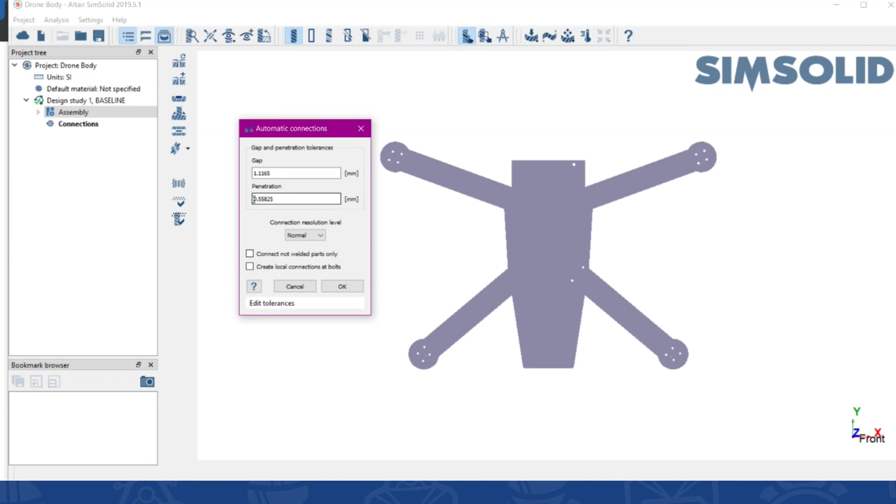We have some options here. We can change the resolution level—normal, increased, or high—or we can change the tolerances. What I suggest is just leave the tolerances, leave it at normal initially, click OK, and as quick as that, it's going to connect everything together.

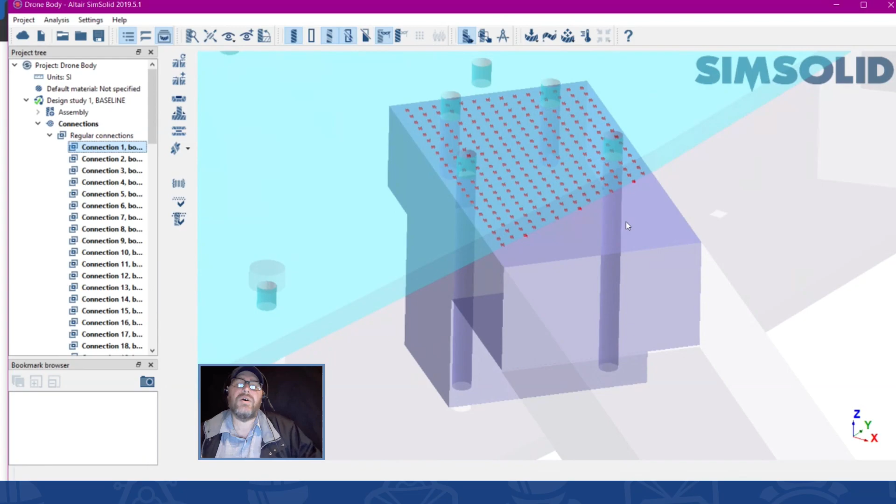Then just take a quick tour of your part. You'll see that once we have everything together, it added this connections entry underneath the assembly. We'll come back to the assembly in a second, but if I click connections, it's going to say regular connections, and now I can scroll through and take a look at all the different connections we have. If I click on one of them, it's going to highlight the two parts. So this drone body, this arm is coming in, and this purpley looking part is one of the two connections, and this teal light blue part is the other, and these little red dots represent the connection between them.

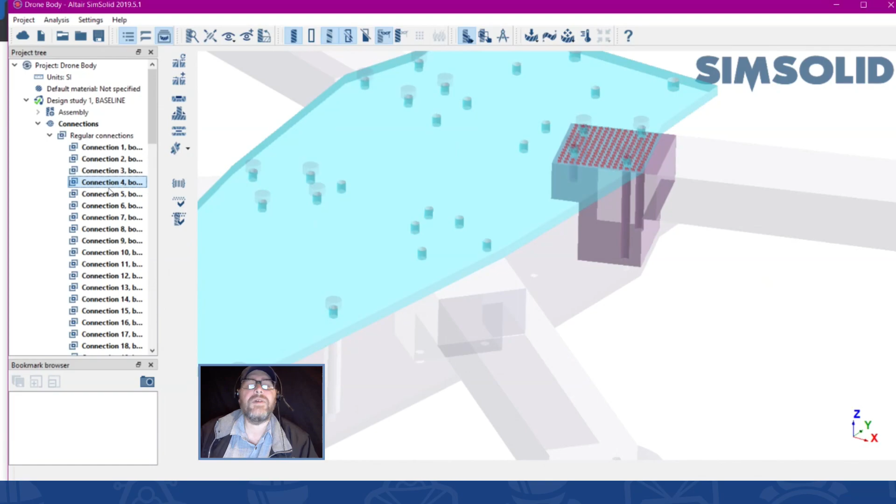So it has connected these two parts together, and I can go through and inspect these connections, take a tour of all the different connections if you want to. It usually does a pretty darn good job of connecting everything together. It's really only when you start experiencing potentially bad geometry that's a little too far apart that you may run into some issues. But in every case I've experienced, just leaving it on normal has done a fine job of connecting it together. It's really only when you have some sloppy geometry that you're going to experience potential problems. So as long as you're diligent about making good geometry, you'll be fine with connections.

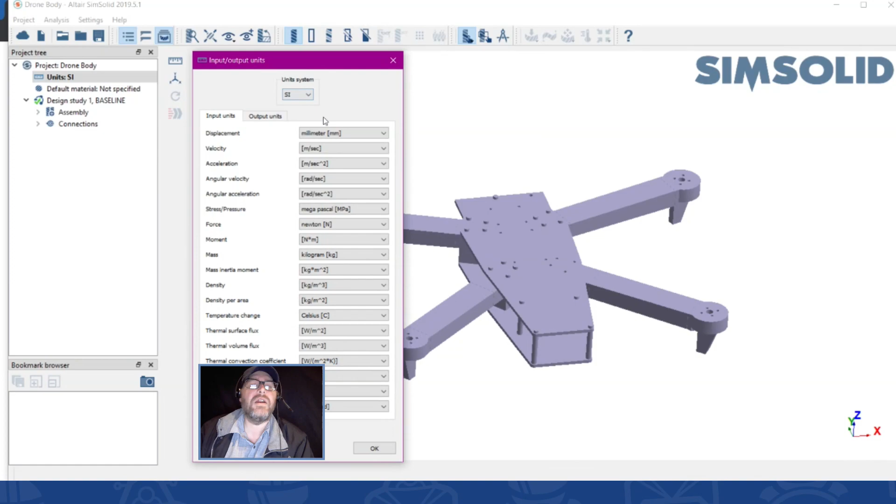Now you'll see we break this into a project. We've got this whole project here, and you're going to find we have multiple design studies under this project. But up here at the top, we've got our basic units. I can come up here to units and indicate which unit system I want to be in. I'm going to stick with SI, so millimeters. I can change the individual units within that unit system—if I'd rather work in centimeters than millimeters, I can change that. This does not affect anything with the part; it's just going to adjust or adapt all the units in there to the new unit system.

So I'm not taking the part and making it 10 times bigger, 100 times bigger, or 1,000 times bigger by going from millimeter to centimeter to meter. I'm just changing the reporting and the numeric values, not the overall size of the part. And then, of course, I can change to IPS if I want to, inch, pound, seconds. That also is not going to affect the part, just the values the numbers are reported in.

And then default material, I could have set that, and what it will do is automatically assign that default material to my part. I don't typically like to do that. I'd much rather assign my materials separately. We'll get to that in a second with the assembly, but just a couple other settings here. If I come up to the top, geometry import settings.

The geometry import settings, there's not a lot: resolution, enhance, fine, custom. Again, I leave it at standard unless I've encountered a problem, which I haven't yet, and then you can change that and it'll grab things. Usually it's when you have a large range of sizes, very small parts to very large parts, and you don't want to lose the resolution on those small parts.

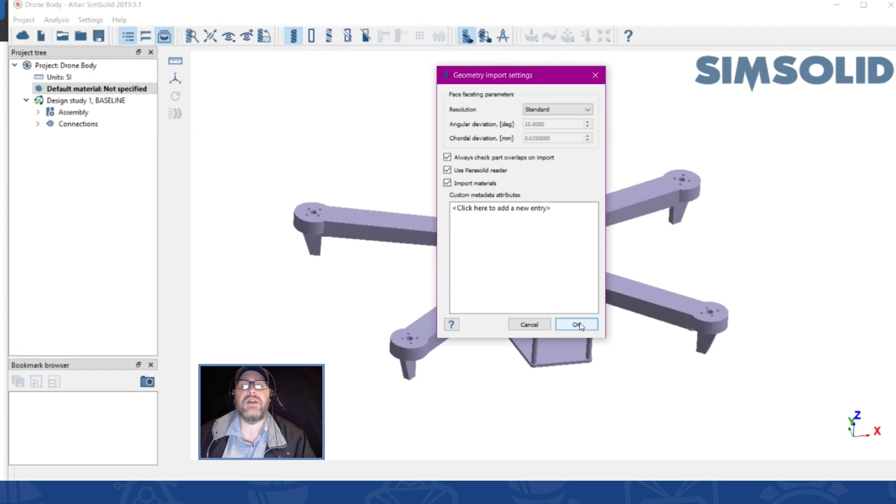The next thing is the standard mouse controls. My left mouse button is doing the rotation, so I let go of it, move it over here, and that allows me to rotate from this side, let go, come to this side, rotate here. My right mouse button is controlling the panning, and then zooming in and out with my scroll wheel.

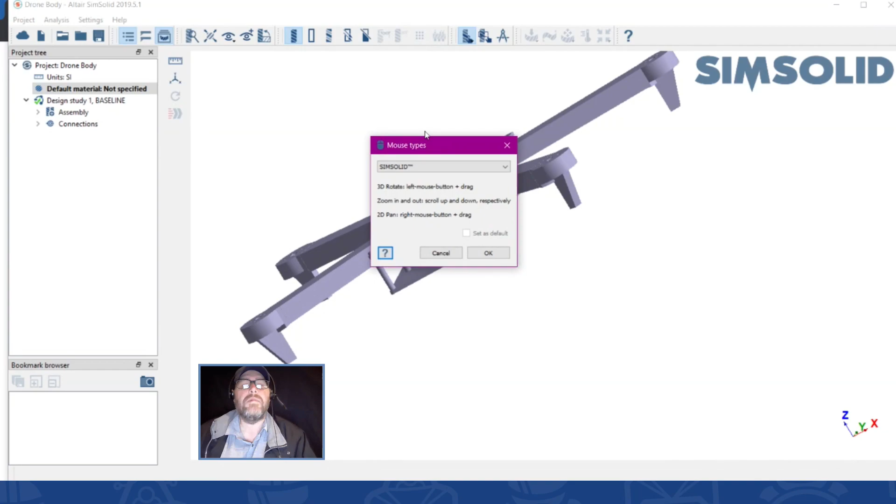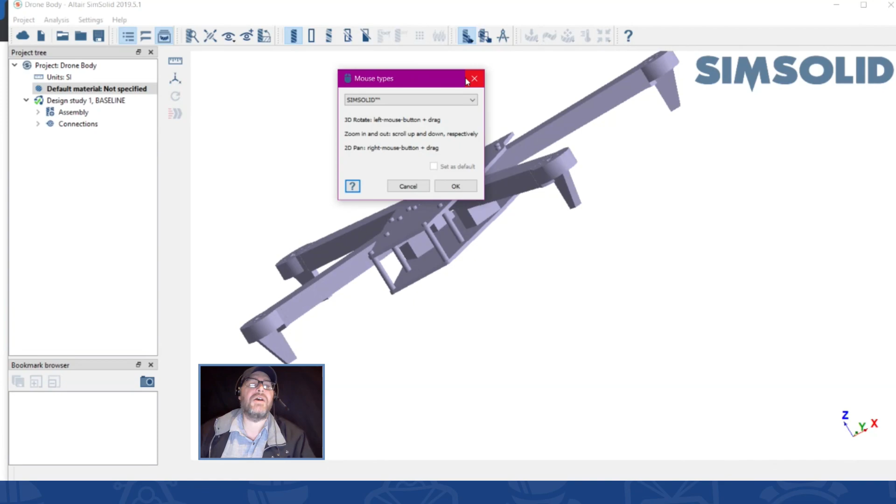But also, if I come up here to my mouse settings, we've included, again like we had with Inspire if you were with us for that, a number of popular CAD packages, and by selecting one of those it will adapt the mouse controls to make sure it's similar to or in the same definition as the CAD package you're in, making that transition from CAD into SimSolid as seamless as possible. And a description is given of what each does.

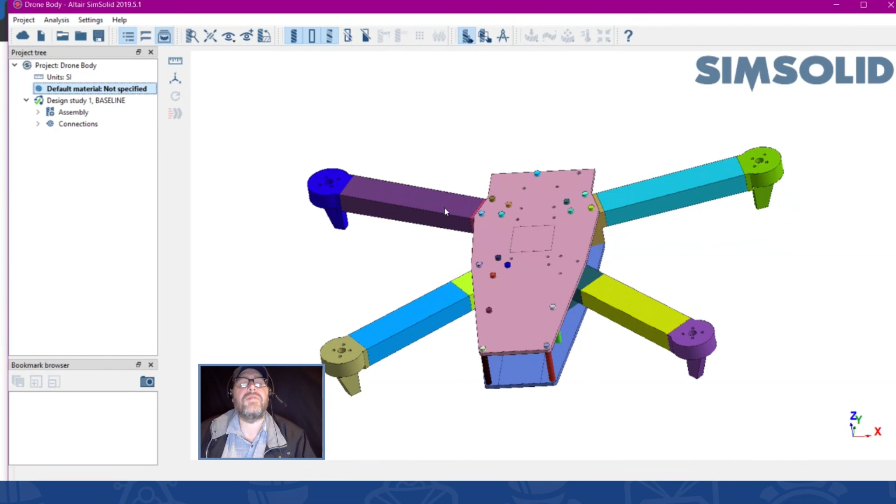Okay, so there's just a few more things, kind of the visualization here. These are our visualization modes: show parts shaded, or show them wireframe. I like this button right here, excuse me, this button takes and changes the colors of each one of the individual parts, so it allows me to visualize the assembly in all of its individual parts. I may not realize, without this, that actually this arm is made up of 3 different parts. I can select them, but this is just a nice, quick visual way of doing it.

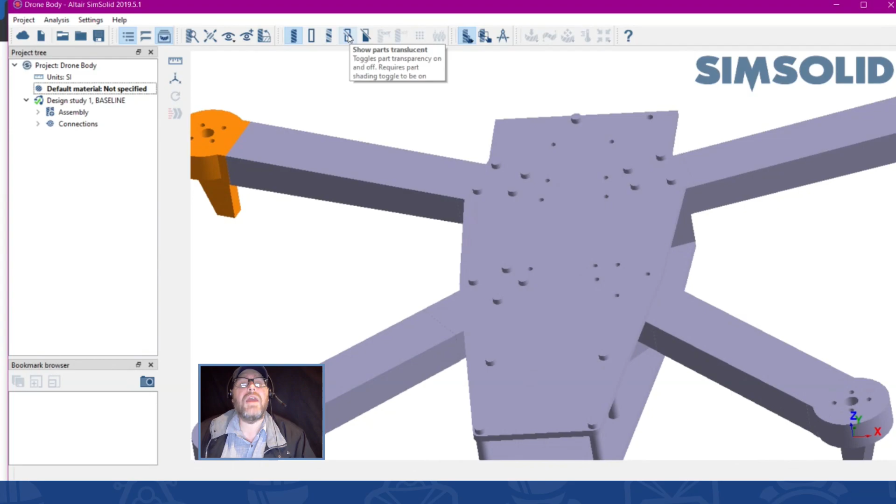And then this option right here turns on edges. I don't normally like that on, we kind of get this step effect, so I typically keep that off. And then we have translucent, so it allows me to kind of see inside there.

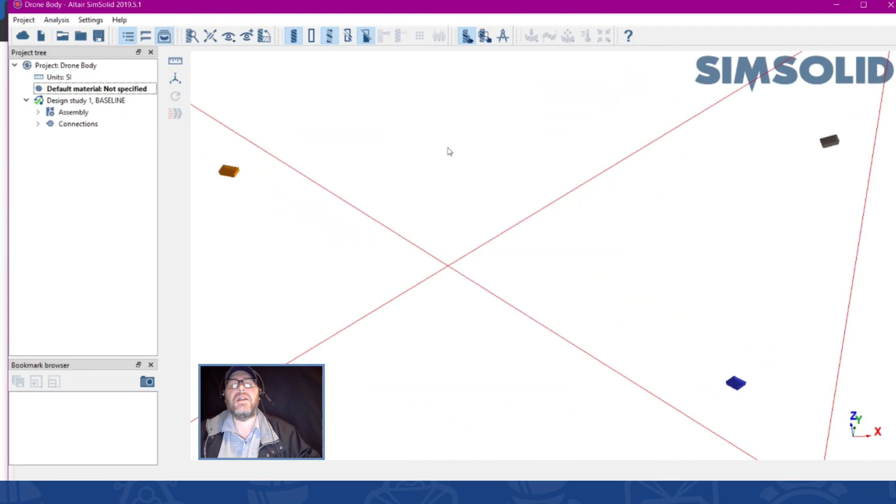And this is a nice one, clip assembly with plane. What it does is it puts a clip plane on there. If I hold my control key and scroll my mouse wheel, let me actually turn the colors on here, and let's zoom in, it's going to take that clip plane and drag it on down. Or if I hold my control key and use my left mouse button, I can actually take that clip plane and change its angle there. And if I mess up and don't get the angle I want, I just turn it off, turn it back on, and it goes to the XY plane.

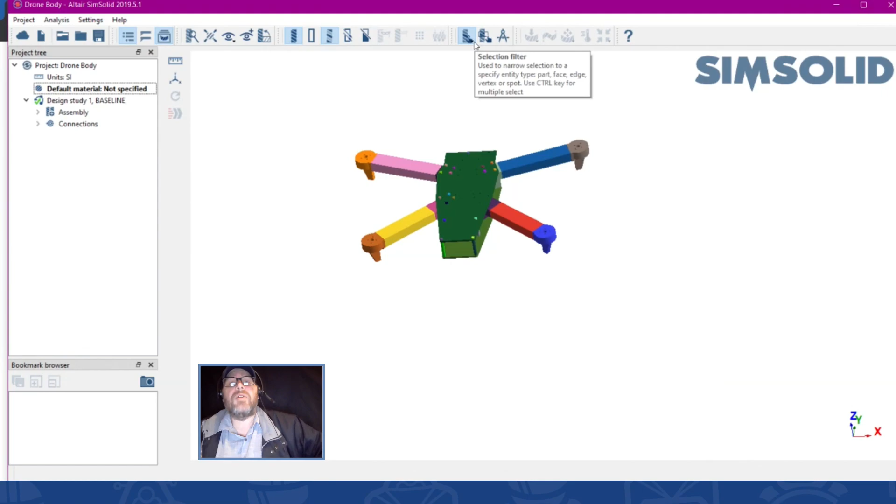Some other things here, we've got measurement. So if I need to take a quick measurement on my part, I just click there and click here, and now it tells me the distance between those two is 189.428 millimeters. So I can get some quick measurements on my part as well.

Okay, so that's the tour of the interface. What we want to do now is get down to running an actual analysis. Honestly, in the time it took to give you a tour of the interface, I could have run 3 or 4 analyses in SimSolid.

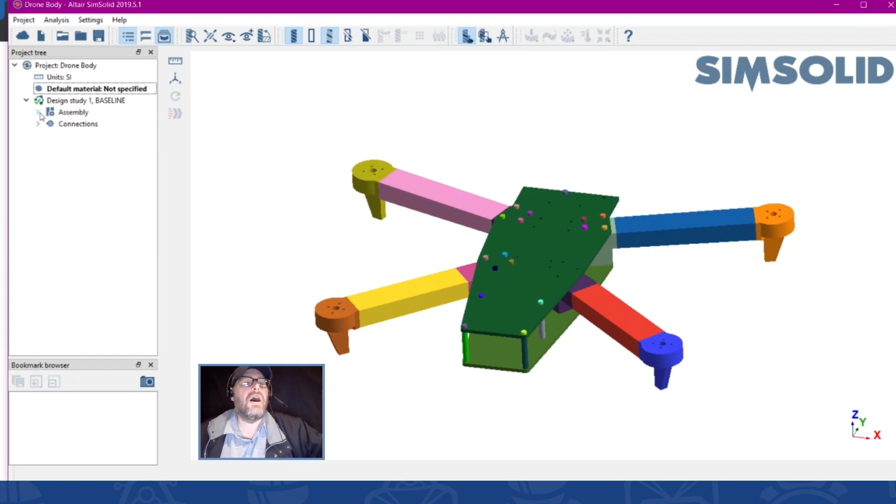It's that quick and easy to do. So I'll open up the assembly, which is a list of all the parts in my assembly. I can select them here and they highlight - I'll take it out of color mode because it's easier to see the highlighted part. I can select here, and it kind of goes in reverse, so if I click this, I can see this is the top plate right there.

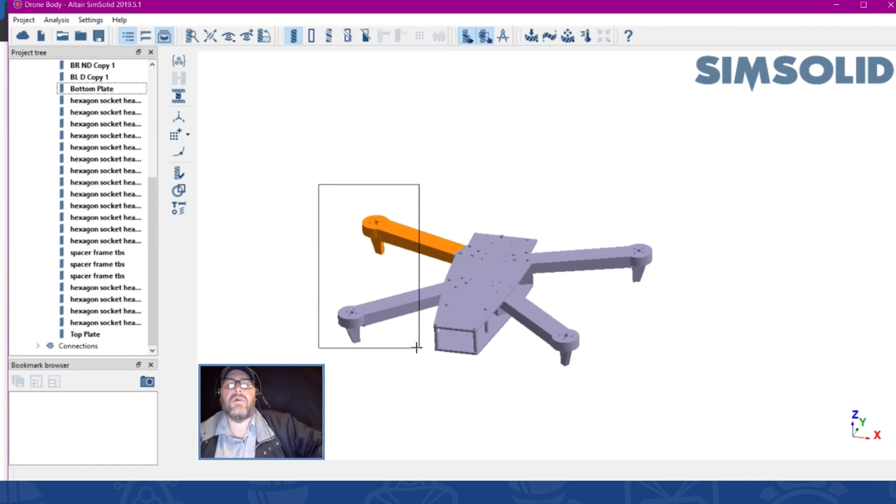Another interesting thing is this box select feature. If I need to pick multiple entities, I come to box select, and then my left mouse button no longer rotates the part, it goes to box select instead. The really cool thing about box select is if I drag from left to right, I only need to touch a part or grab its centroid to select that part. But if I drag from right to left, it will only select parts entirely within the box.

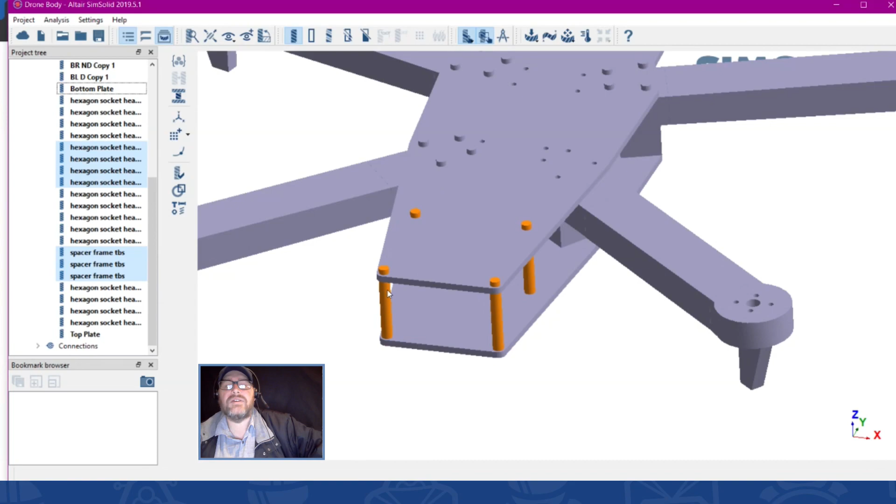So say I wanted to grab these bolts here. If I drag left to right, you see I've grabbed a large number of things, but if instead I go right to left, I've only grabbed those socket heads and spacers there. So that's a pretty nifty feature to guarantee you only select the things you want.

Let me expand that a bit. With my assembly, I need to assign materials, and I can tell there's no materials assigned because the material would show up here to the right of the part name. So in my assembly, I come up to apply material - we've got a pretty extensive material library here. Let's say we 3D printed this, so I'll select ABS plastic and apply to all parts. Now you see ABS plastic has been applied to everything.

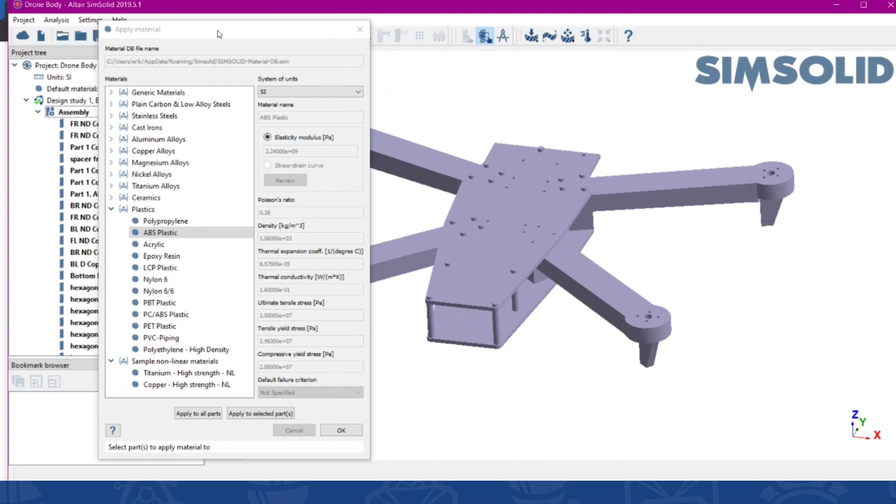If I want to assign things individually, I'll grab those 4 right there, and now in material I could say I want these to be stainless steel, then apply to selected parts. Oops, I messed up - I said all parts. So let's come here to ABS, apply to all parts, and come back up to stainless steel and apply to selected parts. Now you see only the parts I had selected have been assigned stainless steel. So it's relatively easy to apply materials to the entire assembly or to individual parts.

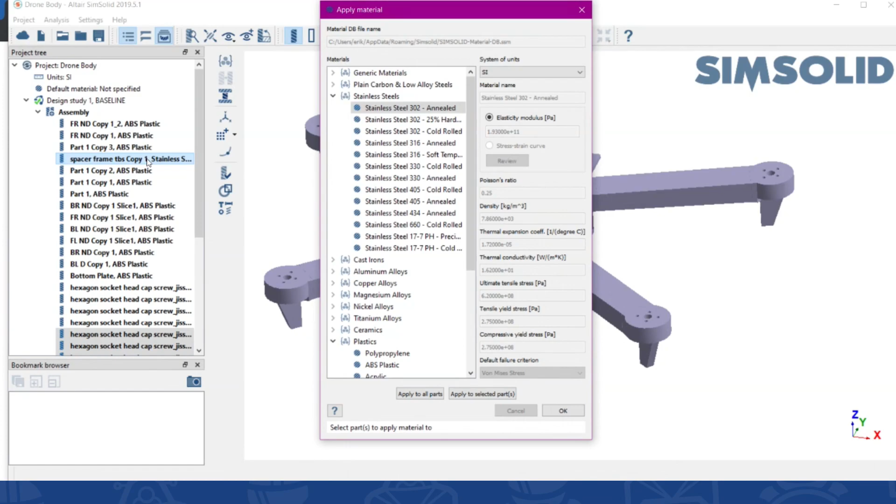Okay, so that's taken care of, and I'm pretty much done setting up my model. The geometry's in good shape, my connections are all made, I've assigned materials to everything, so now it's time to start preparing an analysis. Preparing an analysis is crazy easy within SimSolid.

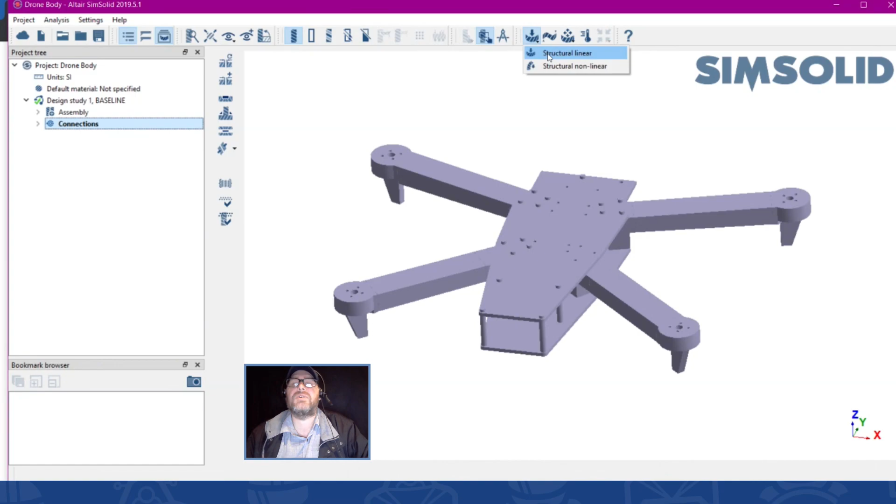I just need to come up to these options here. So here is my linear structural analysis, modal analysis, dynamics, and thermal. I'll start off with linear structural, click this, and say structural linear. It's going to add a study under here - an analysis under my design study baseline, and it's going to be structural.

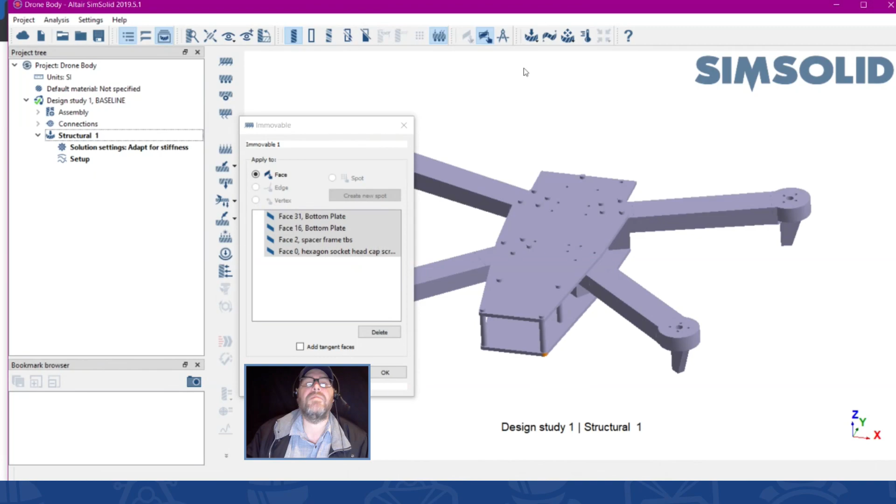Now that I'm in structural, along the side here I have all the things I could possibly need to apply. I've got immovable support, slider support, hinge pivot, spring support, pressures, forces - all the possible things I would need to add. I'm going to start with an immovable support - this is how I'll ground my part, keep it from moving. And I need to turn off box select - I always forget to do that, which means it won't rotate properly.

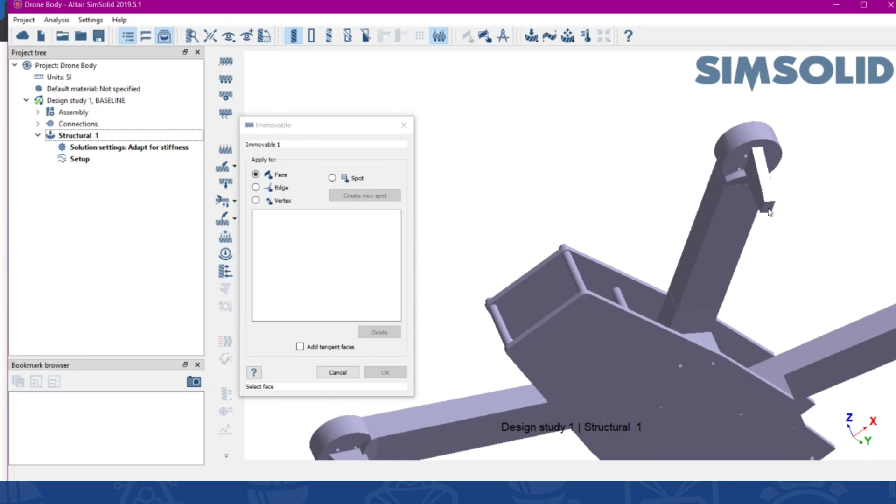And there we go. Now I need to come through here and tell it what I want to apply it to - a face, an edge, a vertex, a spot. I'm going to put it on a face, and apply my immovable supports to the bottom of these feet here. They turn orange when I select them, and don't worry that when I select a new one, the previous one stops being orange - the fact that it's in this list is all I need. So I've selected those right there.

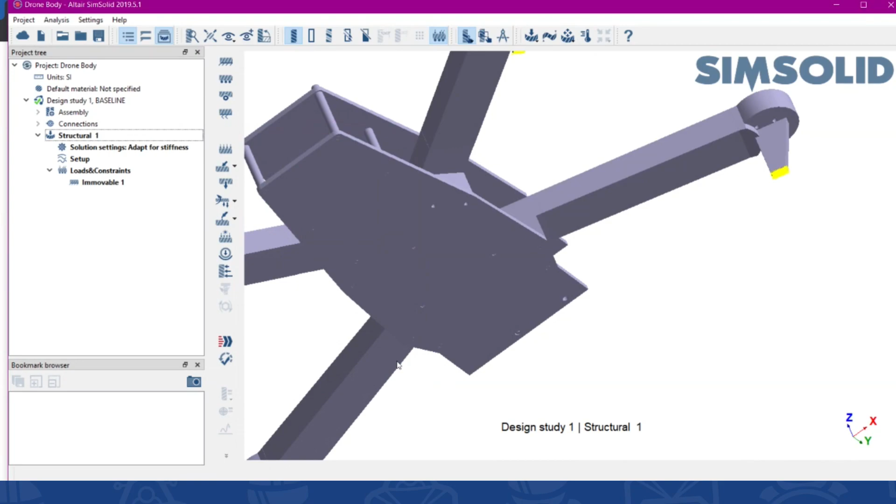I click OK, and now it puts these little yellow dots, little X's, little marks there. Now I know I've got supports there, so this is held on the bottom of this.

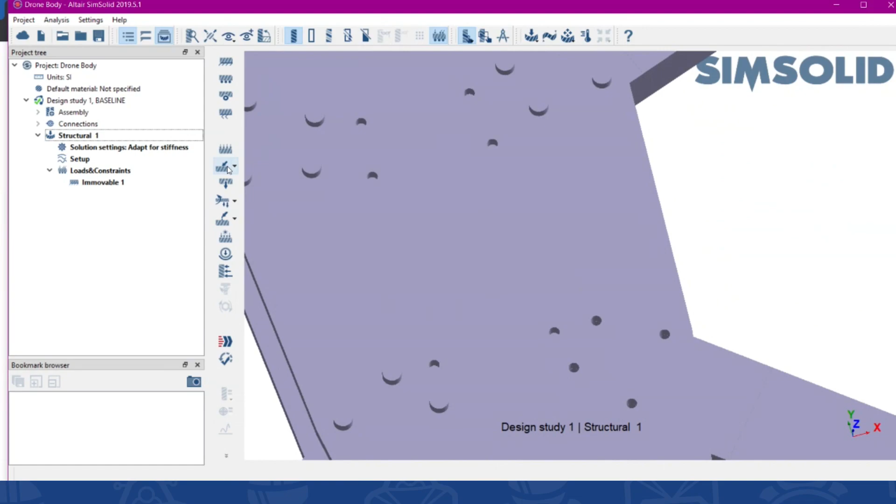What I'm going to do is come up here - it's tough to tell unless I get at the right angle, but I've got an edge in there. I'm going to go to my force displacement and apply that to an edge. Now I can see it, and I'm going to select that edge right there, to simulate maybe the electronics or something being applied there. Now I just have to specify the direction my force is going to go in.

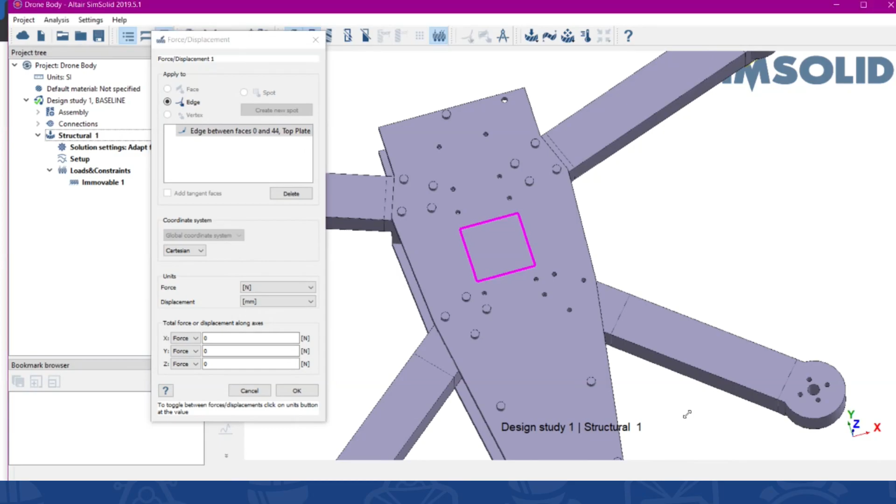So take a quick look at my triad down here. Looks like I want to be in the negative z-axis, so I'll put negative 100 newtons of force onto that. I click OK - it doesn't look like anything happened, but because it was negative, the arrows are going down, and I can see inside there. I've got these little pink arrows, and they're on that edge.

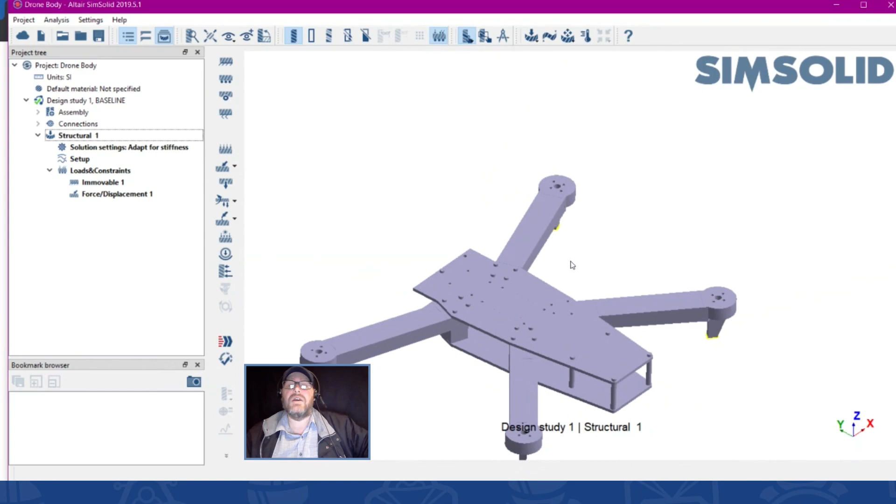So that's it - I've got my constraints down here holding it in place, and I've got my force applied to that. I'm ready to go. You can see how quick and easy that was to set up. Had I not been talking through the entire thing, it would have just taken a minute or so to get everything set up.

And now this is where the true power of SimSolid comes in. I'm going to click this Solve button. And... we're done. That's it - that was a structural analysis on this part. In fact, if I come here and say info, you can see, oh my goodness, that took a whole 6 seconds to run an analysis. That is the power of SimSolid - 6 seconds to run a structural analysis on this part.

SimSolid is a meshless analysis system. It is a geometry-based analysis system. I think people tend to refer to it as FEA because that's what we've always called it, but this is not finite element analysis. This is a whole new style of structural analysis based on geometry.

As a person, I've been 30 years in the industry, and I've been running FEA that entire time. This was a big leap of faith for me, to be told that the finite element analysis I've been doing for decades, now I can do without elements. I will honestly admit it took a little bit of convincing for me, and I ran many studies against parts that I meshed and did the old-fashioned way, the way I'm used to, and then did them in SimSolid. I will tell you, I'm a believer now.

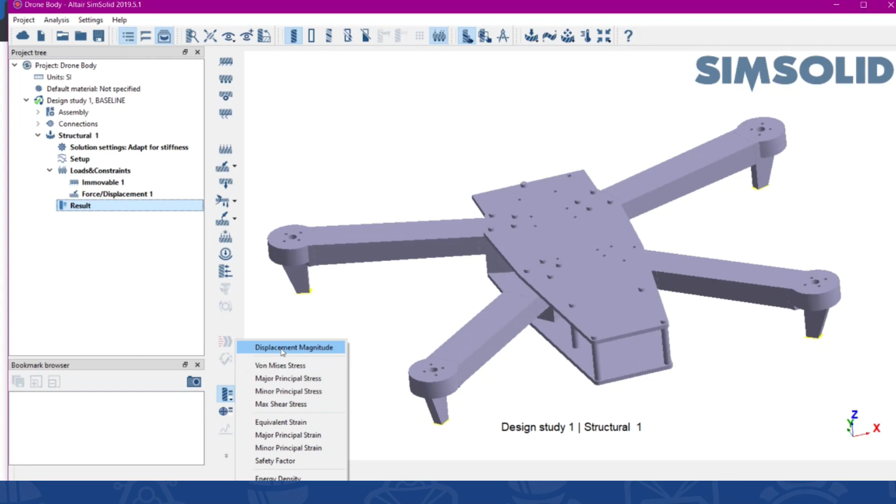But enough about that - now that I've got the result here, let's look at some pictures of it. All I have to do is highlight my result, click result plot, and I get a list of all the different types of results I have here. So we'll take a look at displacement - click that, and I get a color contour plot of my displacement. I've got my legend over here indicating what they are. I can click the play button, and it will play.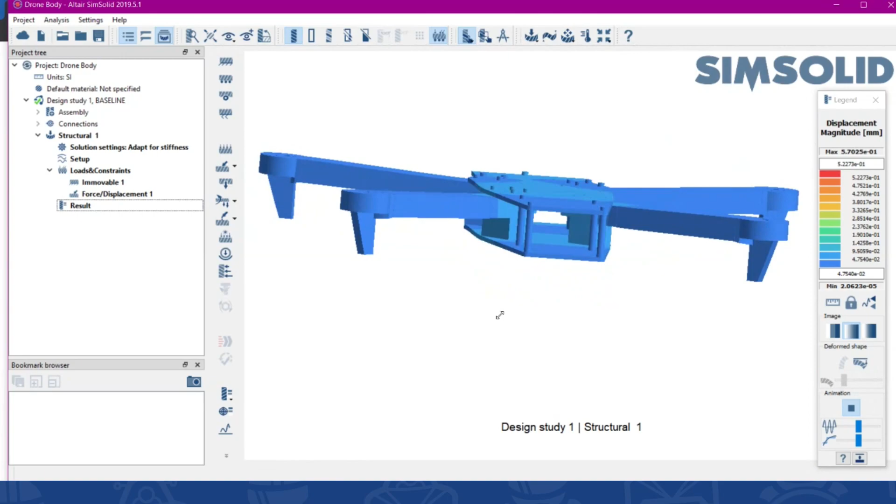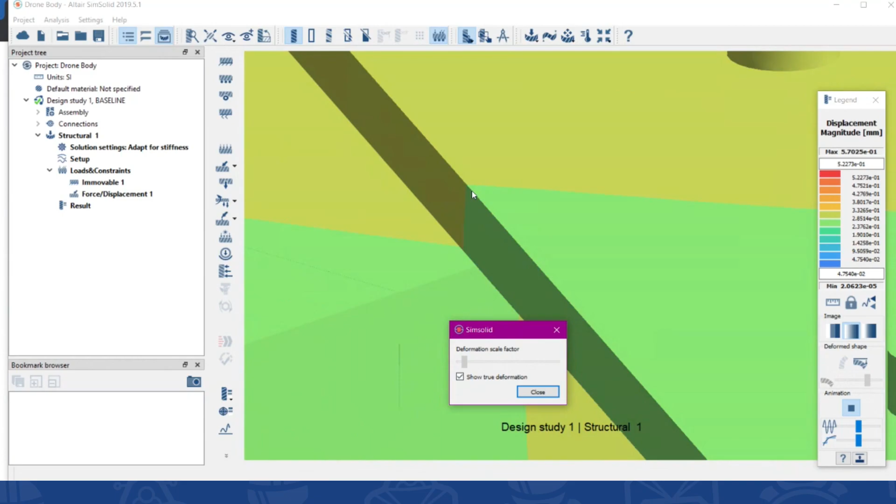Just like other software we have, it automatically scales up the displacement. Don't think 100 newtons of force is going to cause your drone body to do this weird spider dance. I can change the deformation scale factor, click this button to make it really deform, remove the deformation, or click show true deformation. Now you see a little bit of deformation, but it really takes scaling in or zooming in since we scale it up automatically, just to let you see it a little bit better.

Before I do anything else, I'm going to come down here and take a little bookmark snapshot of that. Click that, and it gives me this bookmark down here. We'll come back to these, but this is going to play a huge role when we start talking about different modifications and design studies on this. We'll leave that there for now, but I promise we'll come back to it.

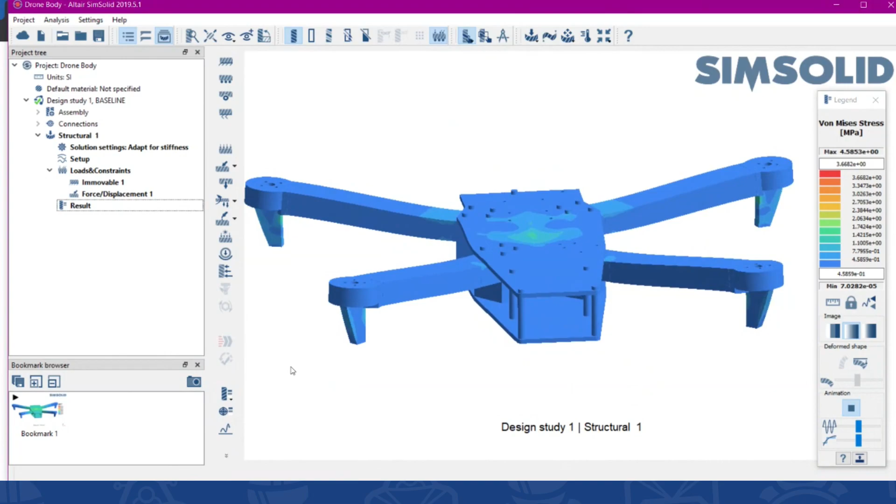Now I'm going to click here and come to von Mises stress. Now we can see the von Mises stress, so we're seeing stress in this area here.

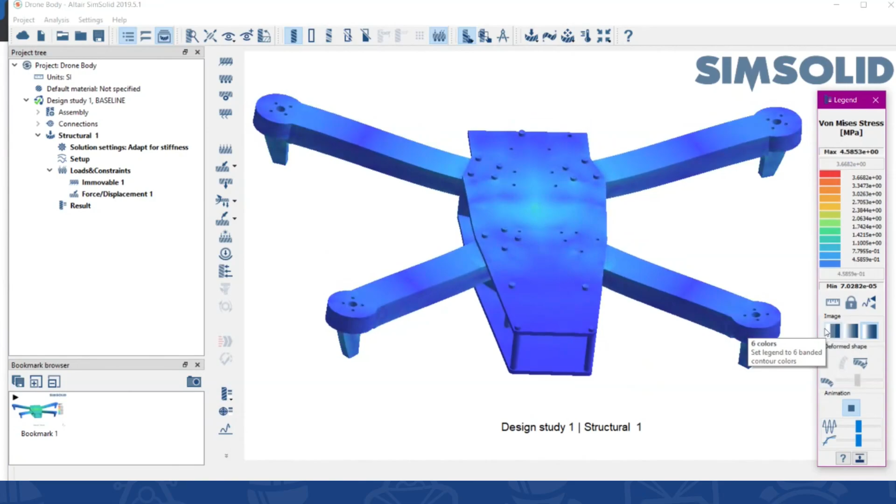Just like with the displacement or deformation, I can change the deformed shape, and change how it reports the different amount of colors, whether distinct colors or smooth colors, 6 colors versus 12. I can show min and max, lock the min and max bounds, and set the output units if I want. I can also speed it up, slow it down, and increase the number of steps it goes through.

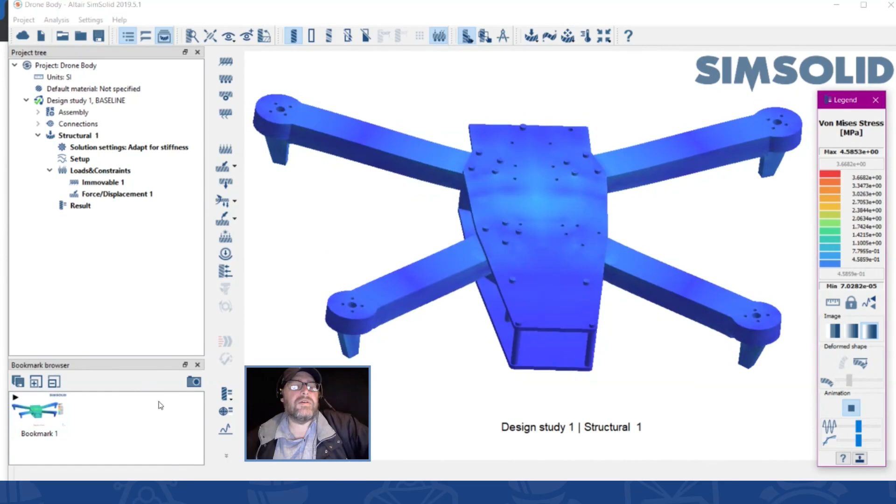Just like I did with the displacement, I'm going to grab a quick snapshot of my stress, and now I've got that. Actually, let me delete that, and I want it shown with the 12 colors. There we go, okay, perfect.

Okay, so that's it, first analysis done. Not done with the demonstration yet, still got some really cool things to show you, but that's how quickly I can run a first analysis. Let me get out of here, come up here, close that down.

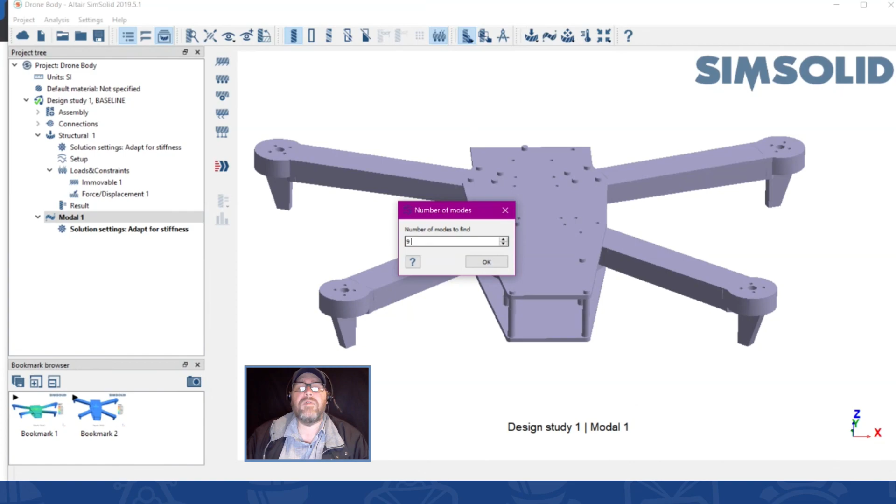Another thing we commonly want to do is come up here and do a modal analysis. Modal analysis is crazy easy, I just need to select the number of modes I want to find, click OK, and run the modal analysis. And just like that, there we go, now I've got a modal analysis. This one took 3 seconds this time.

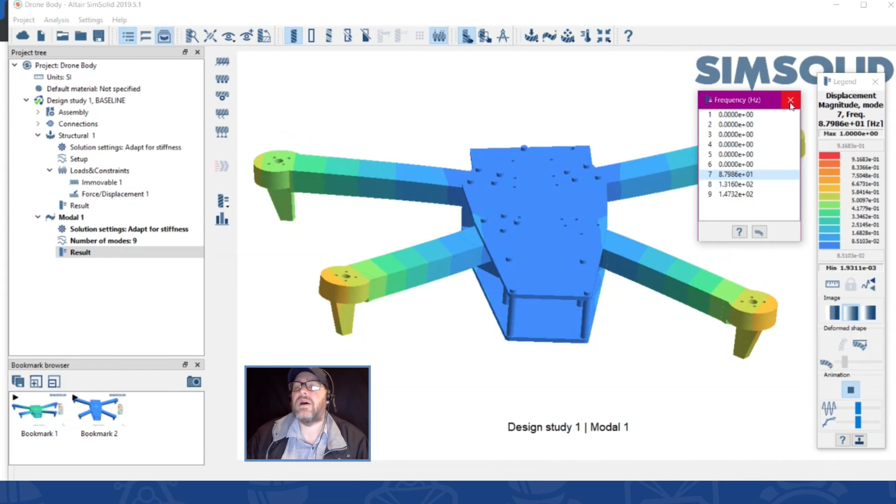Now I can contour my result, do displacement magnitude, and see all the modes that we have here. Because this was an unsupported free modal analysis, the first 6 modes are our rigid body modes, which we ignore. This is our first real mode, and SimSolid was intelligent enough to move you down to the first real mode. I can see the mode shape and how this does. So now I've got my modes as well, I know my frequencies, I know my shapes. That's the standard type of structural analysis we want to do.

But then we could also do, say, a thermal analysis. I can come over here and click thermal analysis, and it now puts a thermal study under my design study. Each one of these studies is being considered its own independent, and I can come to each of them and review that.

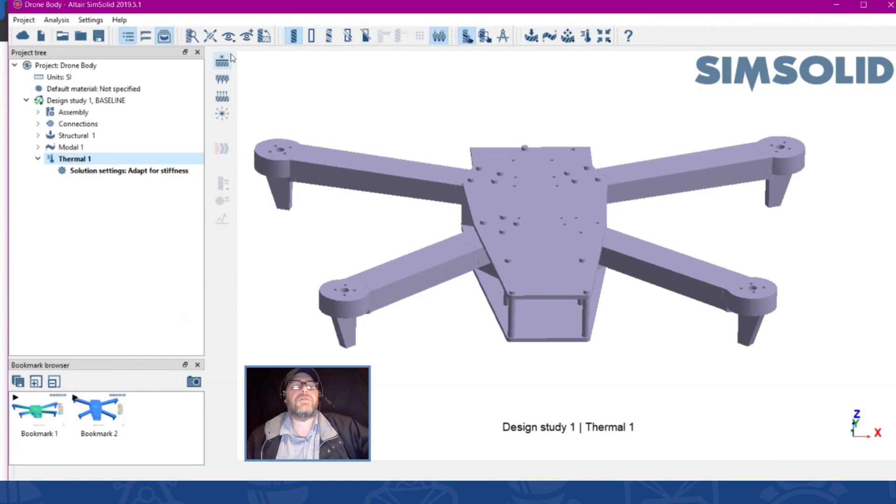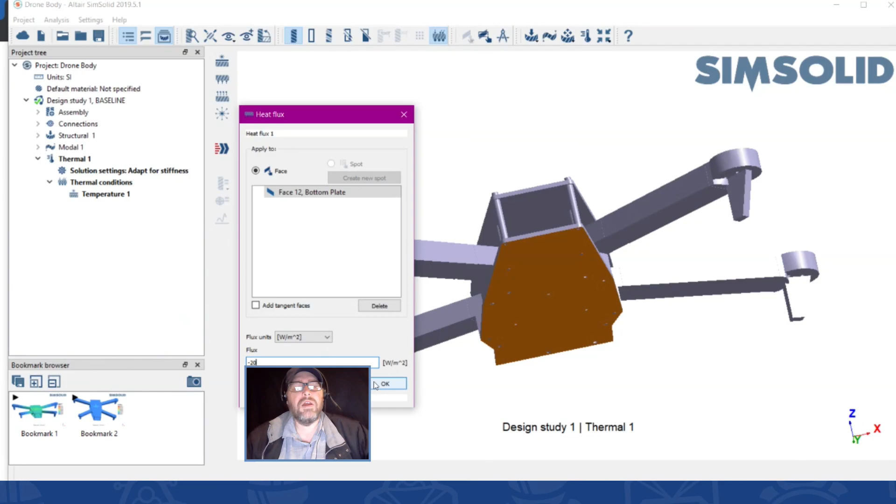We'll come here and do a thermal analysis. I've got a heat load, and I'm going to apply it to a face, pick that face right there, and say this is 100C, really hot. I know I've got thermal flux going on at the bottom here, so I'll come to my flux and say this face is taking heat away, negative 20 watts per meter squared. Click OK, so now we've got that coming off of there, and that's it. Let's run a thermal analysis and see how the heat works through here.

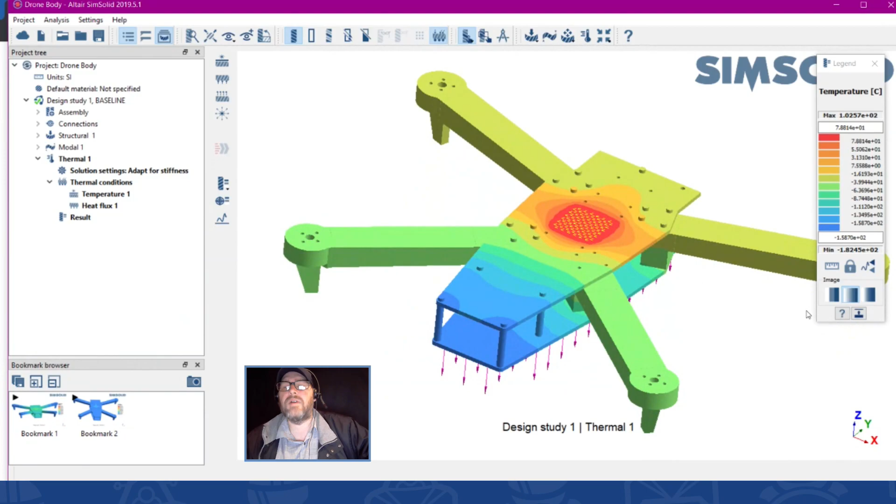So that's done, let's take a look at the temperature. Now we can see there's a really hot spot there. This is doing a nice job of pulling that heat away from there. If I want to, I can look at the thermal flux.

So now I've got a thermal analysis in here, and adding different analyses is that simple in SimSolid. In just a few minutes I've done some pretty complex analyses. But I think you'll find that where some of the true power lies within SimSolid is its ability to do design studies and modification studies.

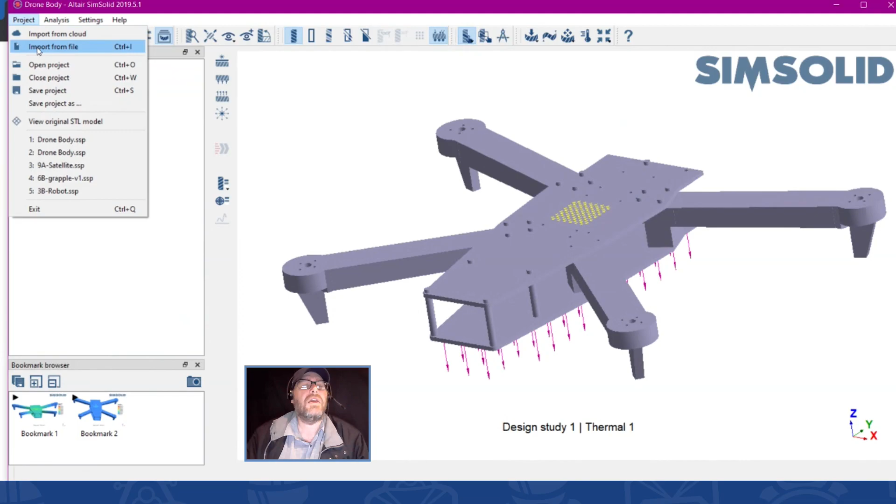So I'm going to come up here and say project, import from file, and now I'm going to grab this drone body modified, and click open. It'll take a second to import it in. Again, I get my little connection wizard here. I'm going to leave everything the same. It worked fine for me the first time, so I'll click OK.

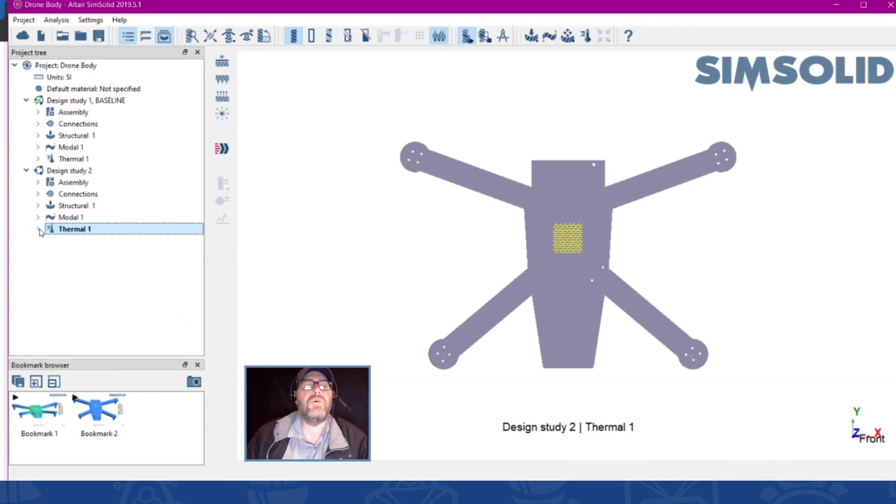And now I've got a design study 2. But notice what's happened with my design study 2 - my structural, my modal, my thermal, all of those were automatically put in there. SimSolid is intelligent enough to realize that this is essentially the same part as I had before, so it knew to go ahead and assign everything just like it was before.

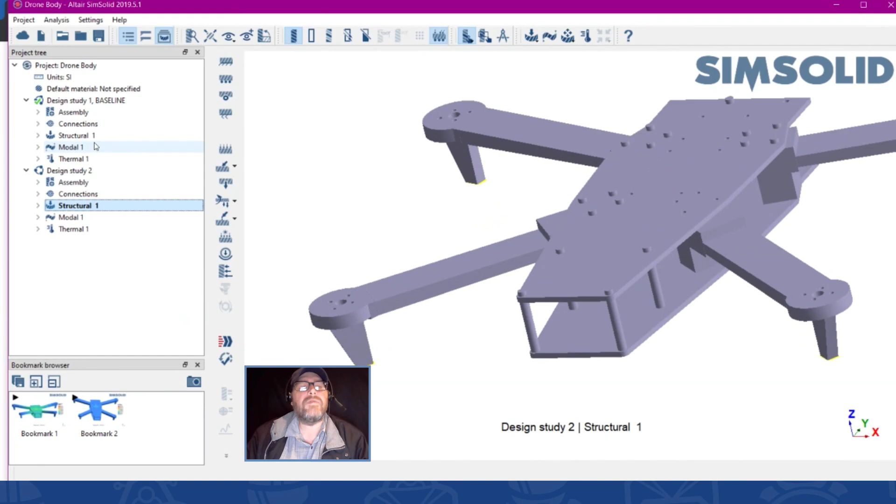And what I actually did with this part is, let me come back up here to structural. If I look at the original part, you see how these arms are pretty thick. I think I want to see if I can save some weight here by reducing the thickness of these arms. So the only thing I have to do now is come down here to assembly, and we'll notice if I select this arm, it has no material assigned to it.

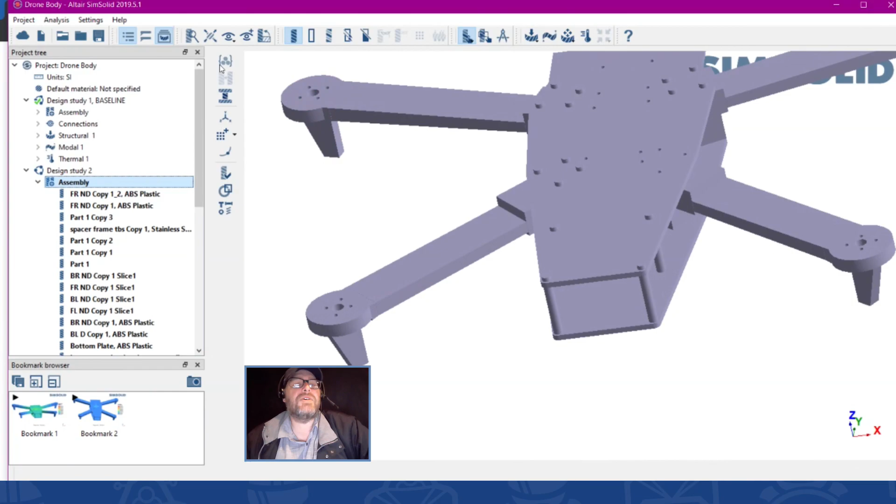Because I modified these feet and arms, it did not automatically assign a material to them. So the only parts that didn't get the same material as the original are all the parts I modified. But again, that's easy to resolve. I just come up here to apply material, select my ABS plastic, apply to all parts, and OK - now I'm good to go.

As simple as that. And now I can come to my structural. The one thing I have to do is actually run the analyses. It imported all of the different setups from my previous study, so everything is set up the same, but I still have to come to each of these and click run.

And then I'll come to my modal and click run, and come to my thermal and click run. And now I have a brand new study for my design modifications. And I can come to my structural and click result.

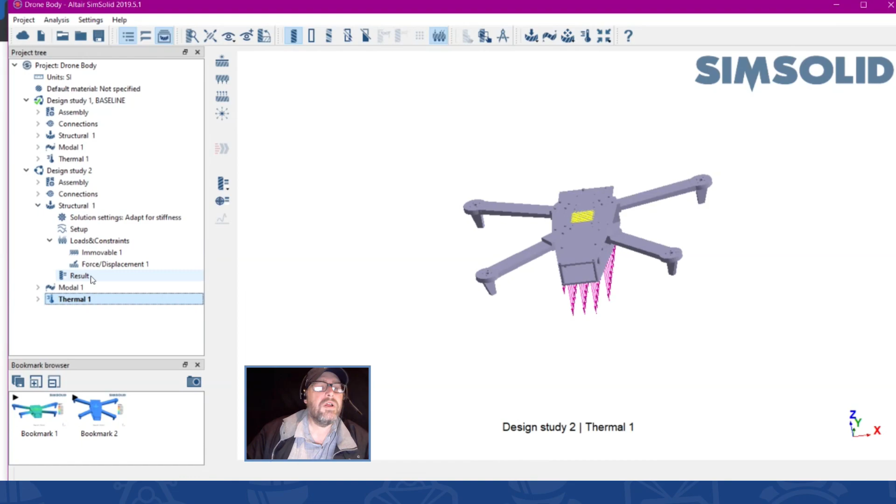But if I click my bookmark here, now it takes my exact settings from the original study and applies them to this study. So I can see I'm looking at displacement magnitude for my new part by clicking result, so I can do a direct comparison.

So I can see here, okay, that's my new study. This was my original, and I can do a direct comparison between the two, or I can come and grab my bookmark 2 - that's my original, that's my new study. And I can see, okay, maybe that wasn't the wisest choice to thin those arms out like I did there.

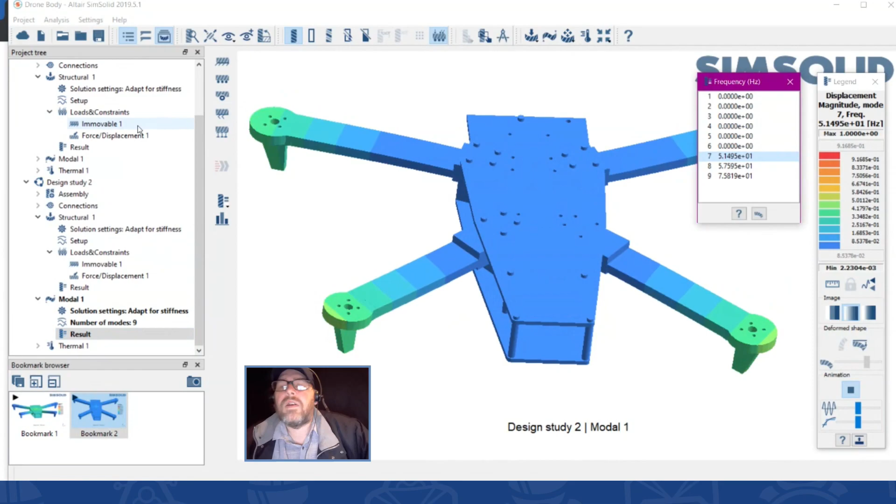Maybe I'm not getting the same results I had before - maybe I went a little bit too far. I can take a look at my modal, and we'll see... okay, I'm at 51.495 for my modal here. So you can see I reduced the frequency pretty significantly.

So maybe I want to take a third shot at this. I like the weight savings I got because of the thinner parts, but maybe I want to make a quick change to that. So I'm going to right click on this and say copy. And now you can see I have a design study 3, and everything is set up just like it was in the other - I've got my structural, my modal, my thermal, everything's the same.

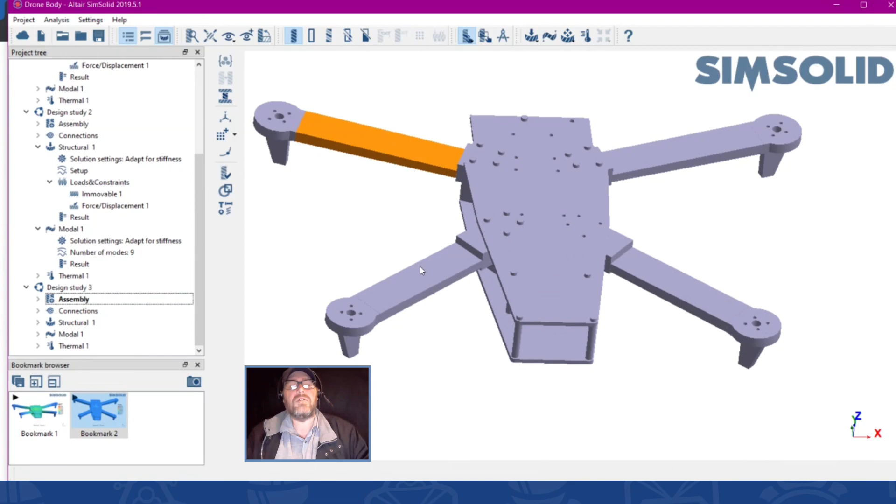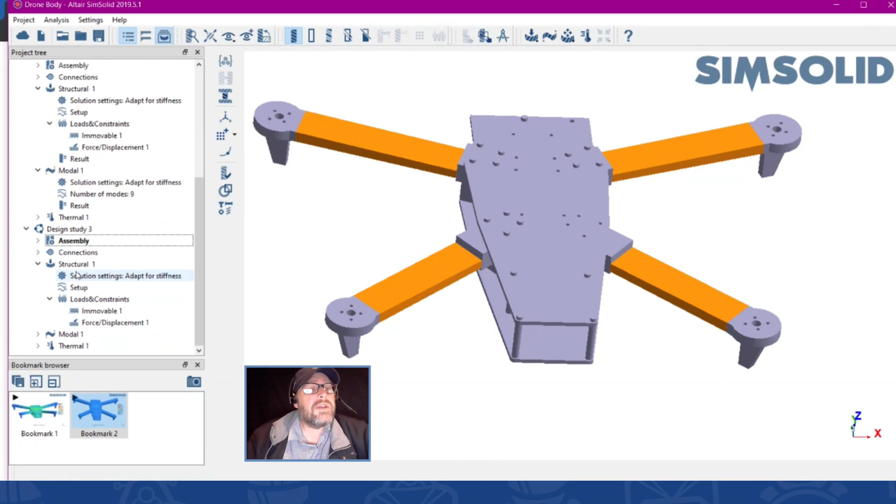But with this study, what I'm going to do is come to my assembly, and control click, control click, control click, and come to material, and we'll go a little crazy - we'll say we're going to make these as titanium. I'm not going to click apply to all parts, just apply to selected parts. Click OK, and now just my little arms are titanium. We'll say I came across some titanium there, and now I can come to structural, grab my structural, and run that.

Come to my modal, and we'll run that. And shrink that and come to my thermal, and we'll run that. It shouldn't have any effect on the thermal analysis.

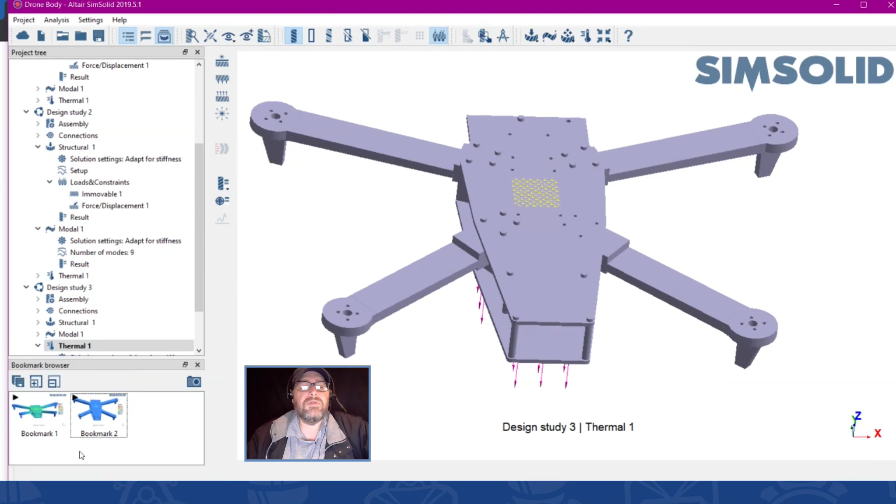But then again, these bookmarks that I put down here are absolutely amazing when it comes to doing design studies, because I can just come to bookmark, and now I come down to design study 3 here, click the result, and now I can see the results of that.

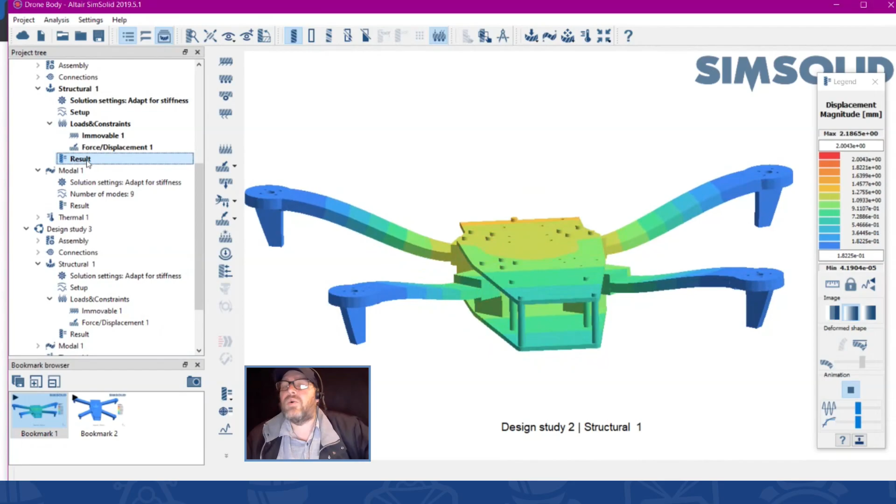So what am I at? 0.48 on that, and my second one I'm at 2. So I significantly reduced the deformation of this part by changing those legs to titanium.

Sorry, just need to rub my eye there for a second.

And now I can come and take a look at my stresses. So that's my original stress. My maximum stress was 3.6. In my design study 2, my maximum stress was 6.1. And in design study 3, I've reduced my maximum stress.

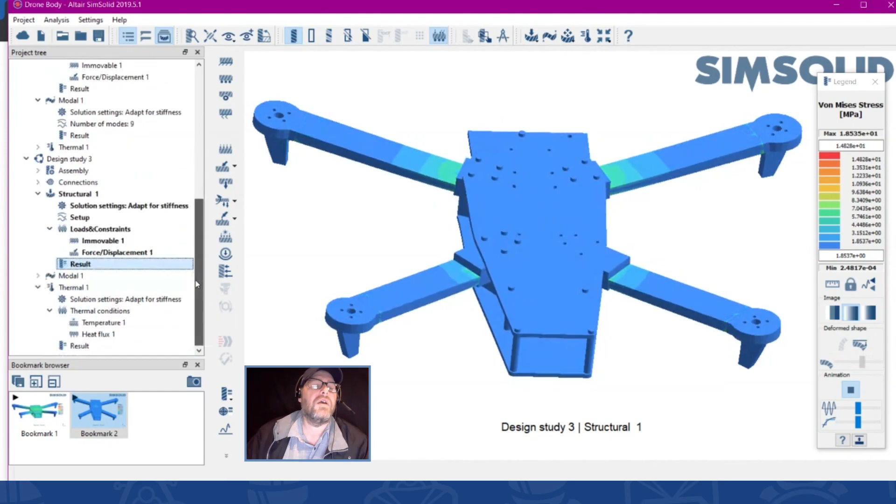Or did I reduce it? No, there we go. Actually increased it a little bit. I guess it makes a lot of sense because these aren't going to move as much, which is going to cause a bit of stress in that area there, but still significantly below the maximum that I can support. But most importantly, I've significantly reduced the overall displacement here.

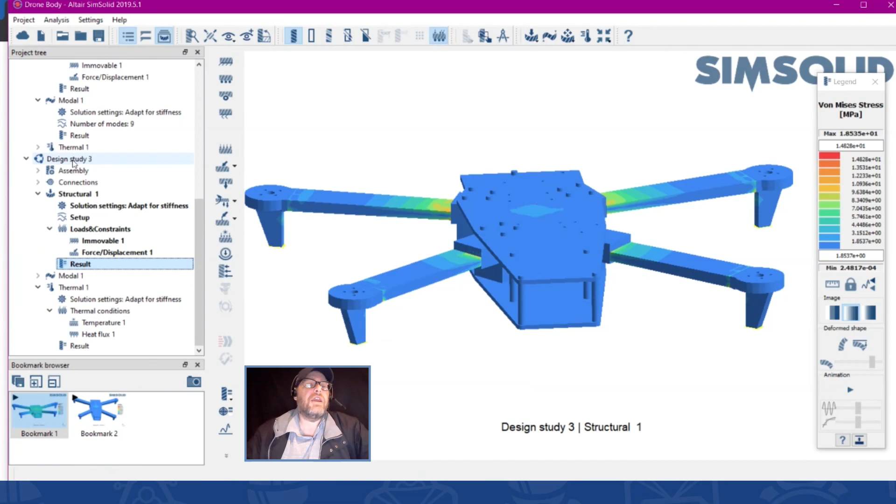So as you can see, using SimSolid, it's very easy to run through a large number of different iterations, different studies, and allow you to review potential changes that you make by just simply bringing in parts that you've modified in CAD, or right-clicking and copying and setting up new studies, changing materials. It allows you the time, the ease and convenience of doing what-if studies.

It's simply saying, what if I went crazy and made these parts out of titanium? What are the effects I'm going to have? In a traditional sense, that could take a bit of time to come up with those answers. But using SimSolid and the ease of use of SimSolid, I can do what-if studies and get a tremendous amount of answers in a relatively short amount of time.

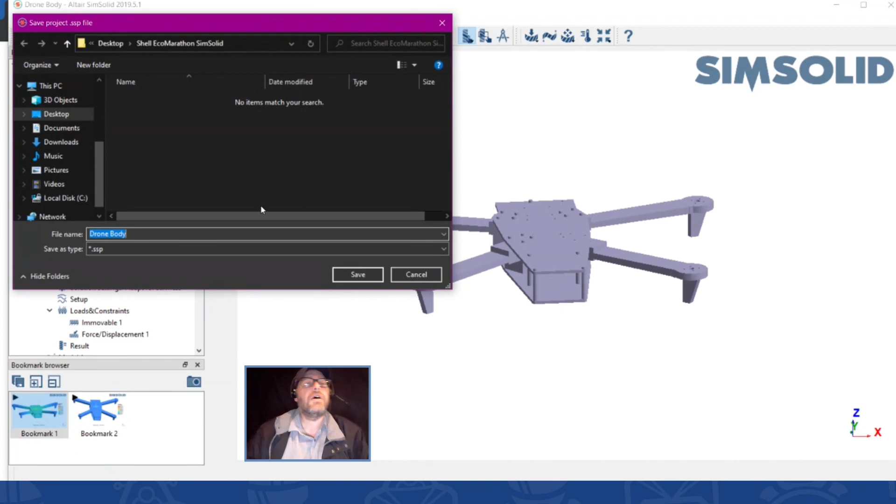So that's pretty much it, other than to say now I can come here, I can save my project as, so I'm going to call this drone body, that's fine. And now you'll see if I come to project, I close that.

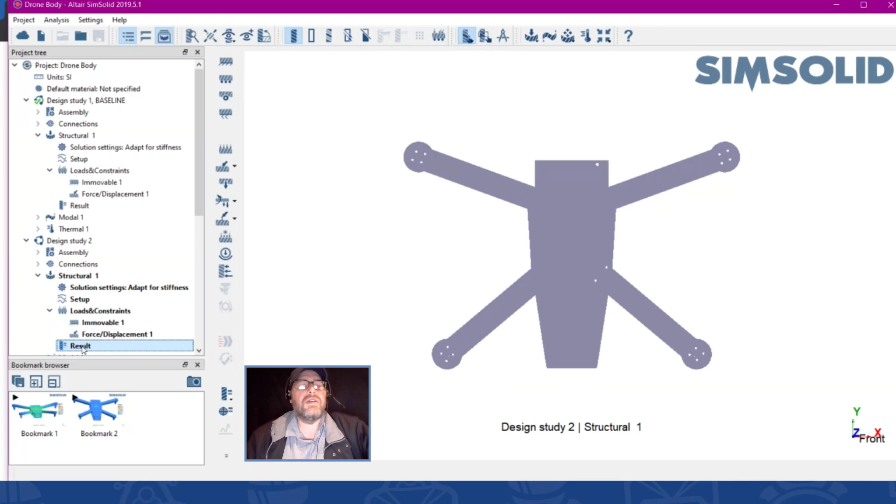And now in a day or two or month or week or whatever, I can say open project, come to my desktop here, and I'm going to open up that drone body, everything that I had in there. It's going to take a little bit longer to open up because it's bringing all that, but everything I had in there is there. All my results are still there. I don't have to rerun the analyses. All the results are stored within there, and the entire design study that I had is all right there, all ready to go. And I could just review the results, or I could continue on with doing a study.

There are a number of other types of analyses that I can run here: structural nonlinear, superposition, thermal superposition, transient frequency response, random response.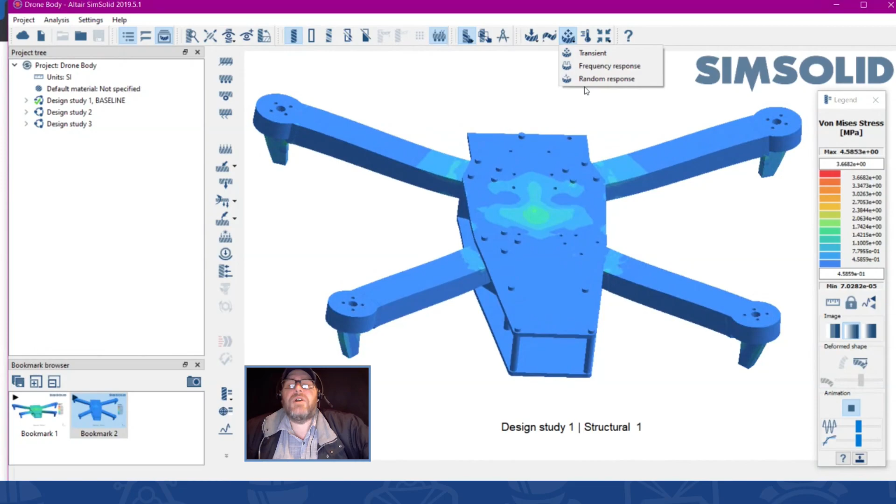But that's just a quick little primer in how to use SimSolid. You see, it's crazy easy to use. It's really fast to get results.

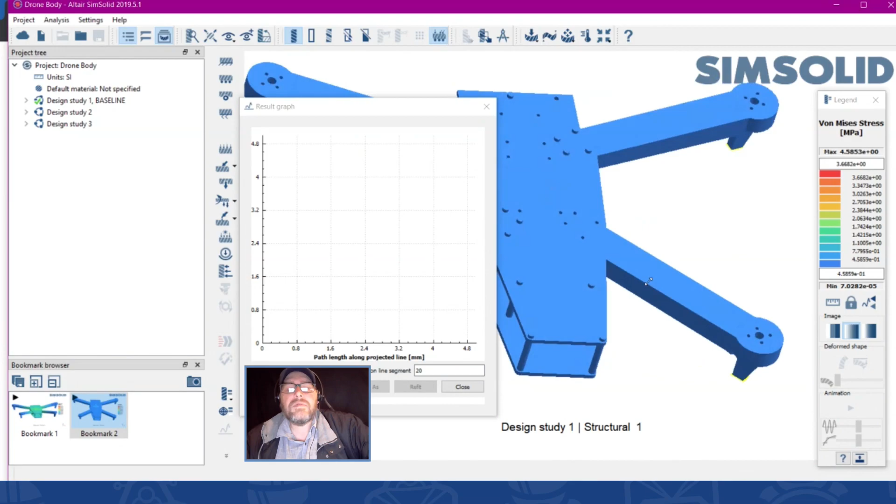I can even do things like a result graph here. So where is it here? Pick at least two. So I can come here. There we go. And now here's a graph of that, of the von Mises stress along that line. So I can get some amazing information from this, and I can get it in a relatively short amount of time. So that's pretty much it for the basics of SimSolid.

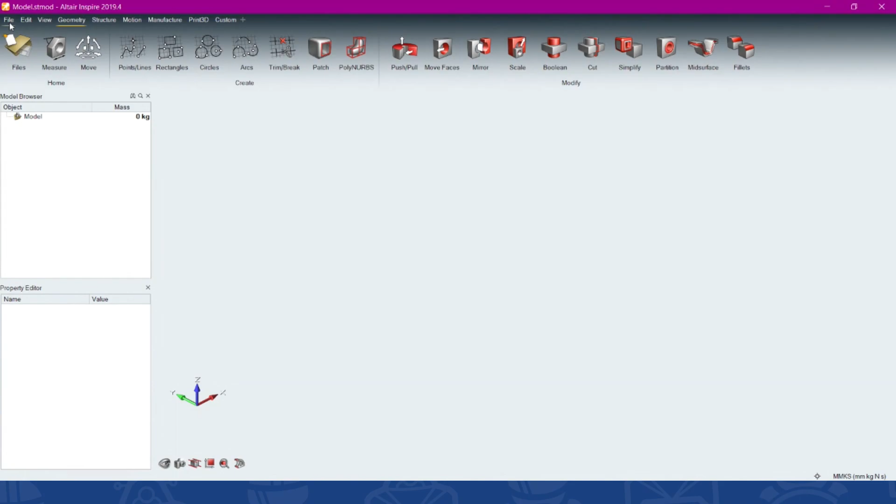I'm going to actually take a step back to yesterday. So this is the Inspire interface we worked with yesterday, if you were in attendance, but I'll show you - if you come here to File, Preferences, and you come to run options, the default analysis solver is OptiStruct.

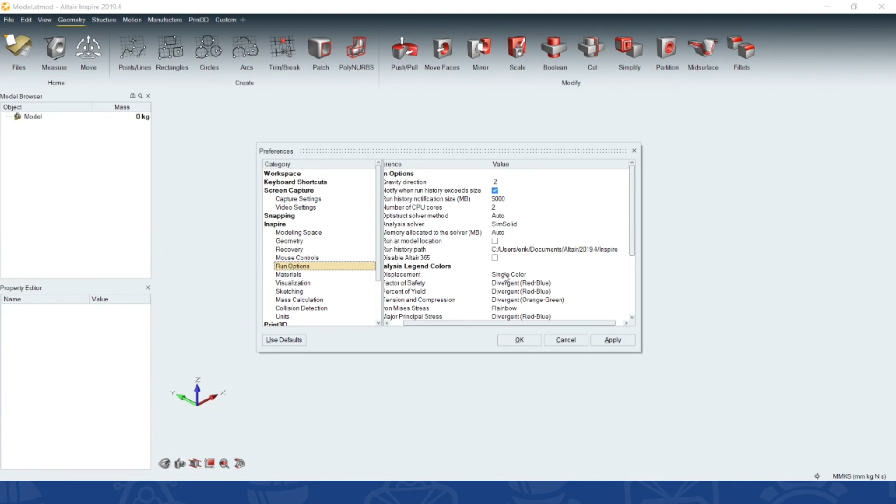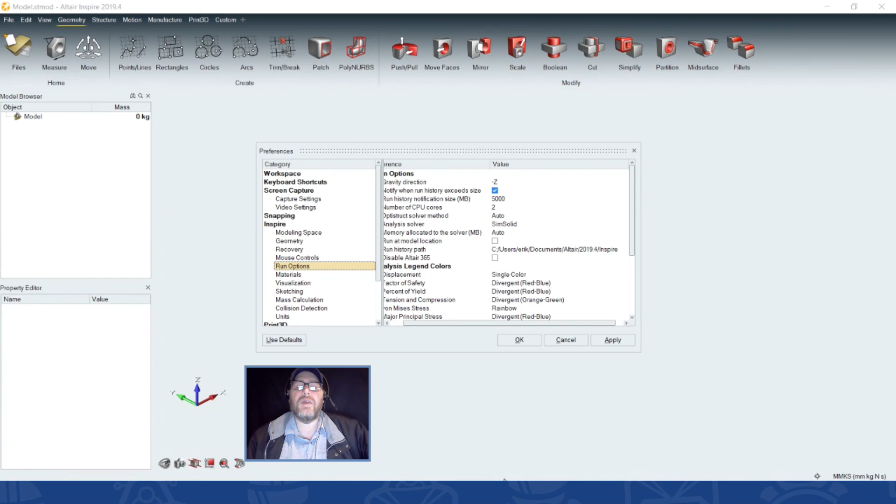But within Inspire, I have the ability to switch over to the SimSolid solver. And what that's going to do is utilize SimSolid solver to do the analysis within Inspire. Now that means we're limited to just the structural analysis - we don't have the optimization capabilities with SimSolid, just the structural. But if you're enamored, as I am, with the Inspire interface, we can actually do SimSolid analyses within Inspire by switching to that, as long as we don't want to do the optimization.

But that means we're just doing the analysis there. Ultimately, I suspect we are going to do some work on the SimSolid interface, kind of bring it more in line with everything else we have. But I don't know what the future truly brings, I don't know what their plans are. But I would expect great things, because every single one of our softwares is looking more amazing with every release.

Thank you, Erik. A question about the functioning of the analysis - how are the equations governed in this type of analysis? Just meaning the FEA uses equations and data from neighboring nodes, but how is it solving the boundary conditions in this solution?

You think they'd tell me that sort of information? I'm not important enough for that. No, I wish I could answer you - congratulations, you managed to stump me.

But the mathematics behind it, I don't know - quite honestly, I don't know. The people who developed this have come up with some way of managing the geometry. I know there's a number of different methods that they kind of string together. At first, I was asking if you're familiar with the P element method - it's a parametric element where you change the order of the equation that defines the edge. I had asked if they were doing that, and it was similar to that in some cases, but other shapes, depending on what the shape is, they've got equations that manage that particular type of shape. So my understanding is it's a conglomeration of a number of different techniques depending upon the shape of the individual solid. And I don't want to say it's voodoo magic, but it's amazing what they've done and how quickly they can do it.

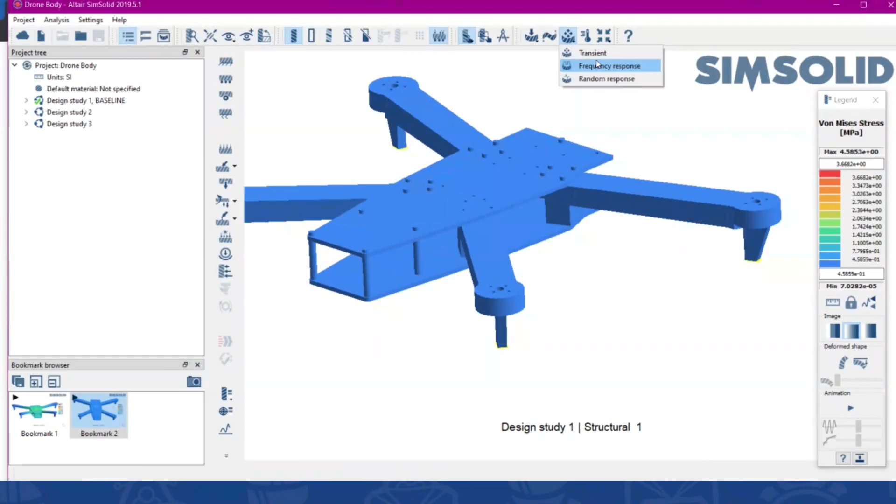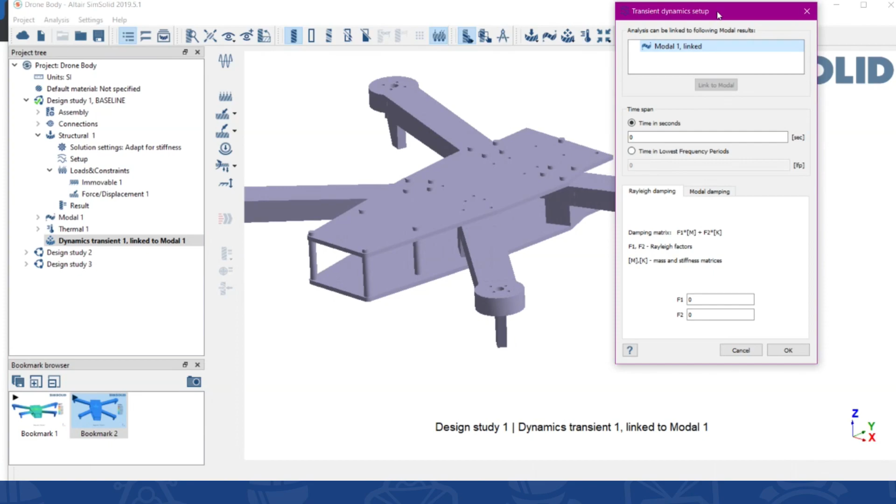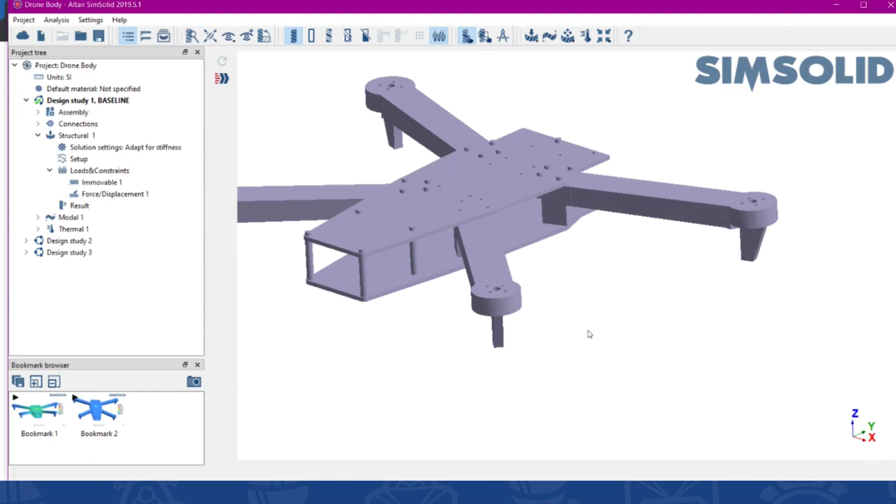Let's see here, just take a look. If we do a dynamics or transient analysis... Just pulled up the transient here. So yeah, I can do a time span for a transient analysis. I can provide the amount of time it takes to come up, I can put in damping. I have not done a transient in SimSolid as of yet, so I'm just kind of working along with you here. It looks like, yes, I can define it over a time, and the time span can't be set to 0. So yes, we can do it over a time. As for post-processing it, I have not done transient in SimSolid as of yet, I've been dealing strictly with structural, but it looks like we can do some pretty quick transient frequency response and random response analyses as well. Now, as for analysis times, I can't tell you what the analysis time is going to be, but I can tell you it will be substantially less than the amount of time it would take to run in another system.

And could you talk a little bit more about modal analysis and its advantages? Modal analysis is very important in engineering, because when we design something, it's going to have some sort of resonant frequency.

You've probably experienced this if you've ever driven down a freeway, a highway, or an autobahn, and you hit a speed and something starts humming in your car. You're going to hear the wheels humming, but it'll excite something, maybe something in the dashboard, or you'll get a squeak of some foam rubbing against something. And literally if you go just a couple miles faster or slower, that's going to disappear. So there are aspects in our vehicles, in everything, that have a specific modal frequency, and we don't want those to excite. When you're talking about an annoyance like that, it's referred to as NVH: noise, vibration, and harshness. You want the people driving in a vehicle to have an enjoyable experience, and having some sort of hum or annoying background noise at specific speeds is annoying.

That's just bothersome. But now think of something a bit more extreme. There are some very, very heavy engines hanging off the wings of an aircraft, and there are some pretty serious devices holding them on.